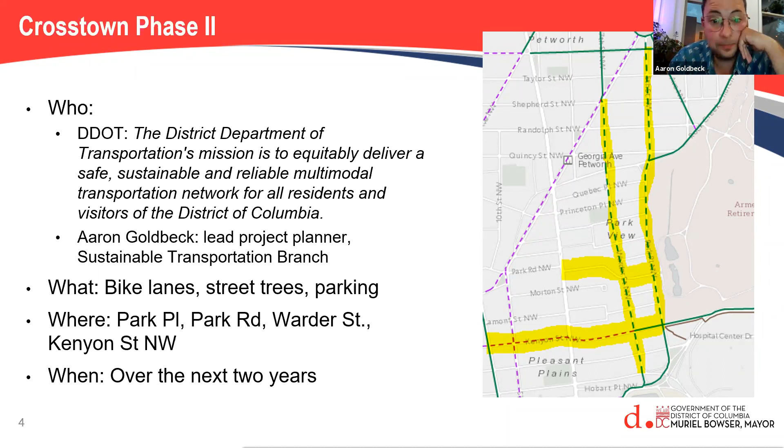She gave us a lot of money to do that, so we're working on that. We're an executive branch agency, so this is a continuation of the mayor's agenda that she ran on and won on. And of course, the budget is approved by council, so the Council of the District of Columbia, we think, also stands behind this work.

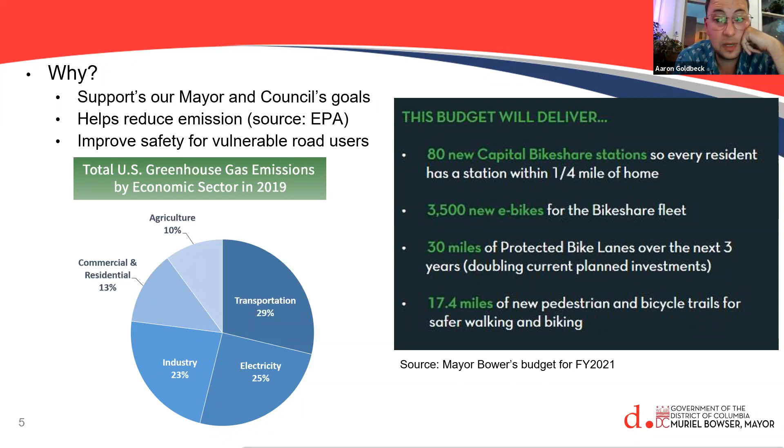Finally, protected bike lanes are the safest way we can move people around without cars on our roads. So we think this will have a net benefit to safety for vulnerable road users—bicyclists, pedestrians, and so on. So that's the why.

So how did we get here? It started back in 2014 with the MoveDC update. MoveDC is the master plan for what DDOT hopes to do in the future with all the streets and sidewalks in the District of Columbia. That recommended we look very closely at this particular area.

So we did that in 2016 with the Crosstown Multimodal Transportation Study. All of these projects we're talking about this evening were recommended in that 2016 study, which was a real deep dive—there were a lot of public meetings and a lot of outreach as part of that.

In 2017 through 2019, we did the first phase, which was the two-way protected bike lane on Irving. Now we're moving on to the second phase, the protected bike lanes on Park, Warder, and Kenyon that we're talking about this evening. We hope to be done with all this—I put next year on here optimistically, though I suspect it'll take a little longer than that because things always do. But this is the broad timeline of this project. It's been in the works for a long, long time.

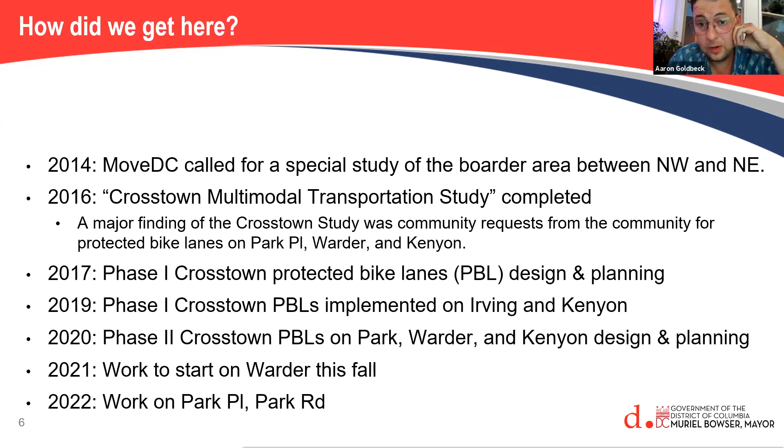So a quick update on Warder, which we've already discussed extensively in these meetings over the last year. There was an NOI published that closed back in August. Comments were very supportive, and the feedback we got was very, very good, so thanks to everybody who commented. We are hoping to begin this work for Warder in late fall—that was the most precise I could get the construction team to give, so I'll say late October, early November. I'll get a more precise update from them as soon as possible to pass on to the ANC.

They want to begin excavating the tree pits, doing this in a way that minimizes disruption—going one block at a time rather than the whole corridor at once. Trees will be planted in April, and bike lane implementation, with restriping and the addition of bollards, flex posts, and concrete barriers, will also happen in the spring. This is a little vague for Warder; I was hoping for more detail for this meeting, and I'll provide that as soon as I get it from the construction folks.

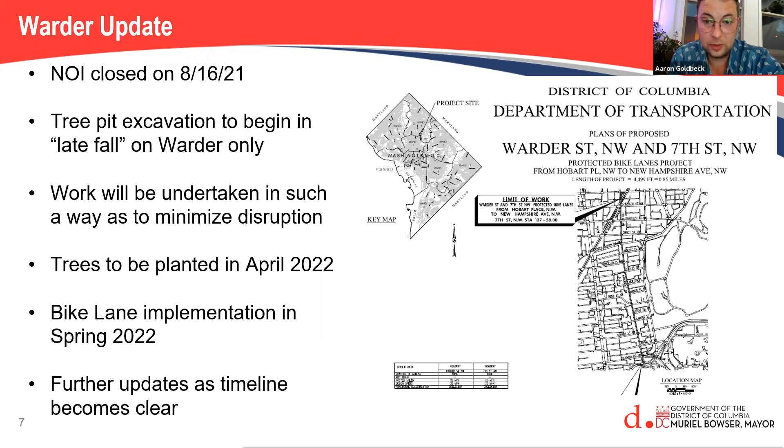Looking now at an overview of what else we have to discuss this evening, I'll show you the plans for the parking-protected bike lanes we're going to put onto Park Place. We're also going to be adding a lane of parking on Park Place. We are going to make Park Road one-way westbound—this slide is incorrect, my apologies—it's going to go west with parking along the south side of the street. We are also looking at a parking-protected bike lane on Kenyon Northwest. All of this will lead to a net parking gain in the neighborhood.

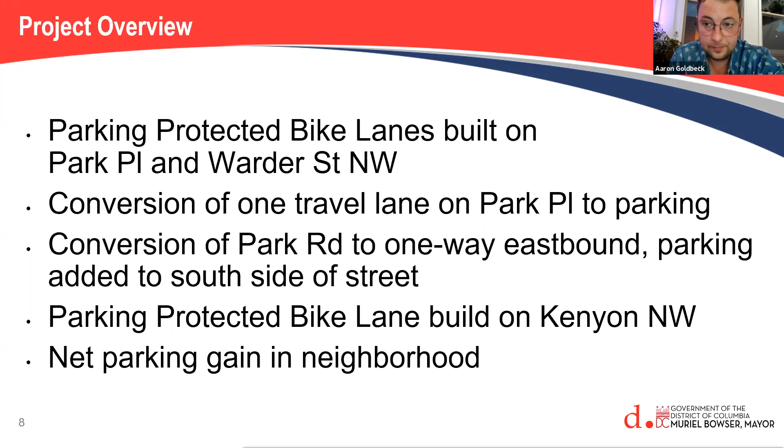When I'm throwing around these terms, parking protected bike lane, counterflow bike lane, what do these mean? I want to show you some pictures, some examples. On the left there, you can see a great example of a parking protected bike lane. It has 2 lanes for cyclists to go in both directions, and it is separated from moving cars by parked cars. Then there's a buffer for people getting out of those parked cars. There's 3 feet there for them to open their car door safely and step out and walk without having to worry about whacking a bicyclist with their car door.

I wanted to show an example of a counterflow bike lane. This is what we are looking at for Park Road as part of that one-way conversion. You can see an example here from 11th Street Northwest. That's what that's going to look like. It's going to allow for 2-way bicycle traffic on the road while only having 1-way car traffic. So nothing we haven't done elsewhere in the district.

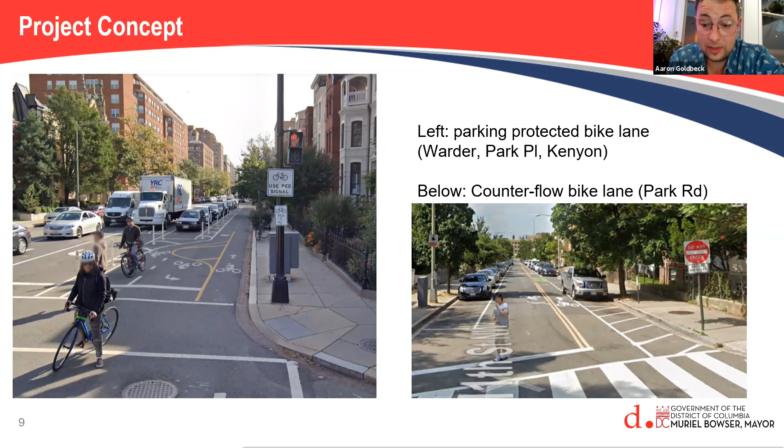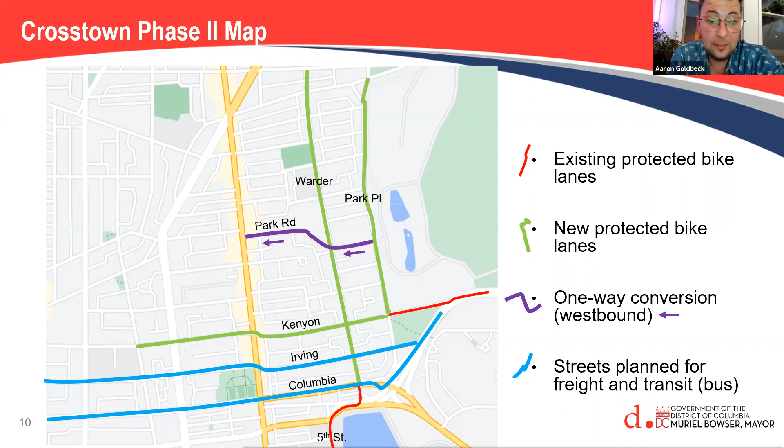This takes us back to the map just to refresh our memories. It's going to be those parking protected bike lanes on Kenyon, Warder, and Park Place. It's going to be that counterflow bike lane and the one-way conversion on Park Road going westbound. And we are going to be leaving Irving and Columbia alone for future transit, bus-related projects, which will be coming in the next several years.

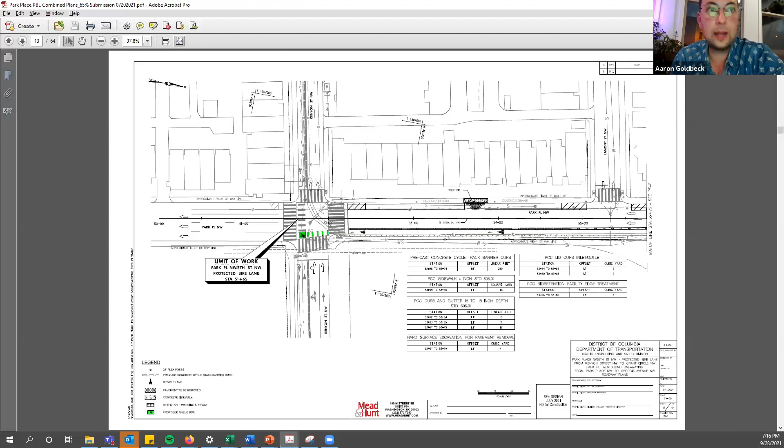So I'm going to begin here on Park Place. We are going to start here at the intersection of Park Place and Kenyon. This is the southern extent of the project as it is conceived now. So we're going to be going north against the flow of traffic. This map is a little bit confusing because north is going to be to your right-hand side on the right side of the screen. South is on the left side. West is at the top of the screen. East is at the bottom. Please bear that in mind.

This is going to be connecting to our existing two-way cycle track on Kenyon that runs east-west. We expect the majority, if not all, of the bicycle traffic to turn either left or right and proceed either eastbound or westbound when they reach this point.

Moving north, we can see the first of one of our new street trees that we're proposing here for this block. We'll be seeing 9 more of those as we proceed north. You can see the protected bike lane here is actually not parking protected. It's protected by precast concrete barriers and flex posts.

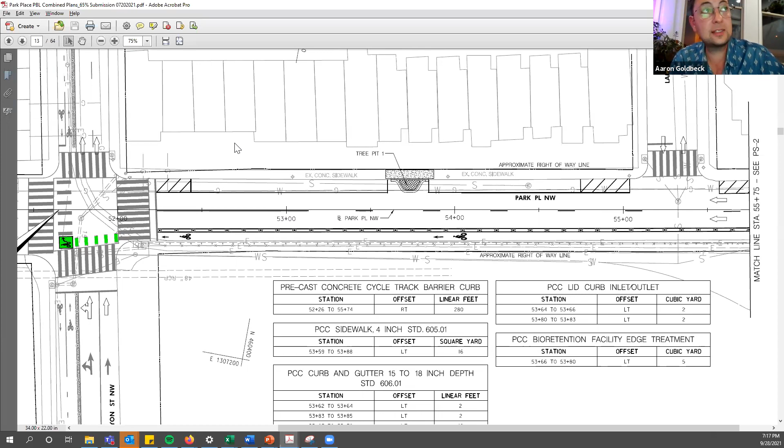Moving to the next block, we see how the parking begins here once you get north of Luray Place. This is a new parking lane on the east side of Park Place. So the parking will be on the left side of the street as you're heading southbound down Park Place. You can see here where we are also doing curb bump outs and crosswalks. This is all new stuff. They're not crosswalks this time on Park Place because there's nowhere to cross to.

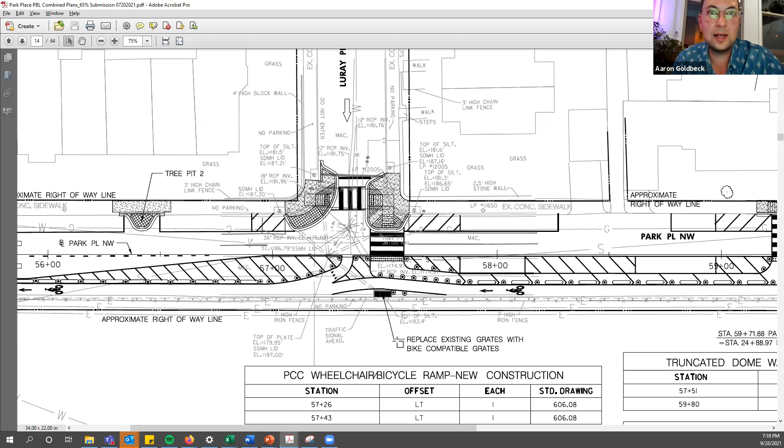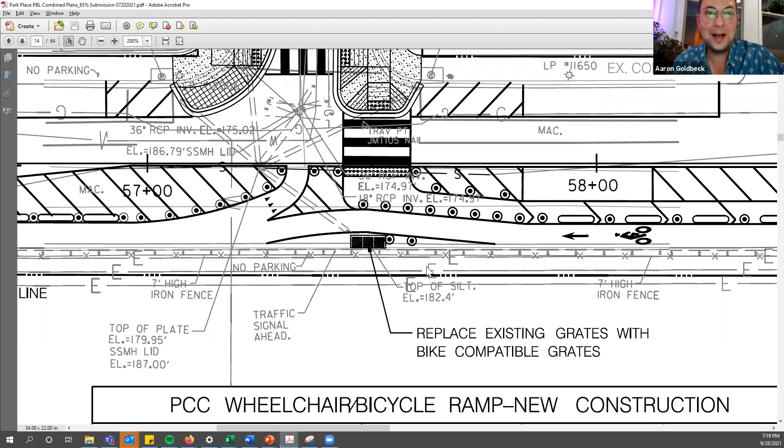You may notice that the bike lane does this very interesting sort of slalom here. You can see where the bike lane curves around, and it's to avoid this grate, which is not safe to bicycle over at this time. I expect that this is not going to be the case in the final design. We're working on switching out those grates right now, so we don't have to worry about this later as we're implementing the rest of the project. So I anticipate that when I come back with the 90% plans for this segment, this is going to be straight and nice, and you're going to be able to bike over those grates without issue. That comment has already been made by every single person at DDOT who's looked at these plans, because that does look kind of weird. So we are going to make that a nice straight bike lane.

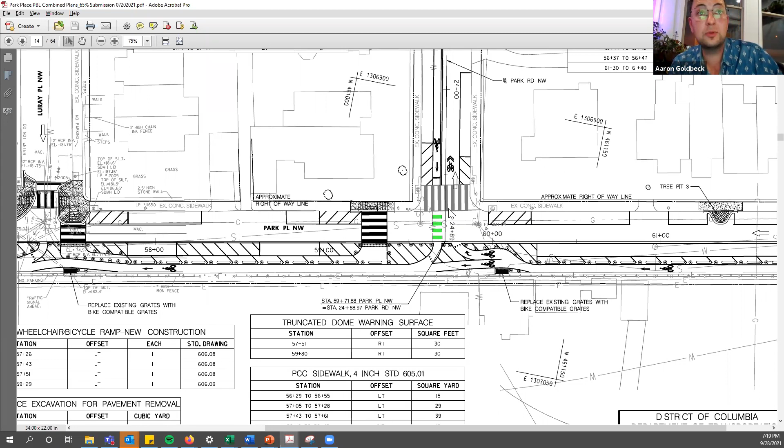So this here is the intersection of Park Place and Park Road. You can see that one-way westbound lane stretching up towards the top of your screen, and you can see the counterflow bike lane I mentioned before joining up with the Park Place protected bike lane. That's how that's going to look.

We're going to see the rest of Park Road in a moment, but we're going to stay on Park Place for the time being.

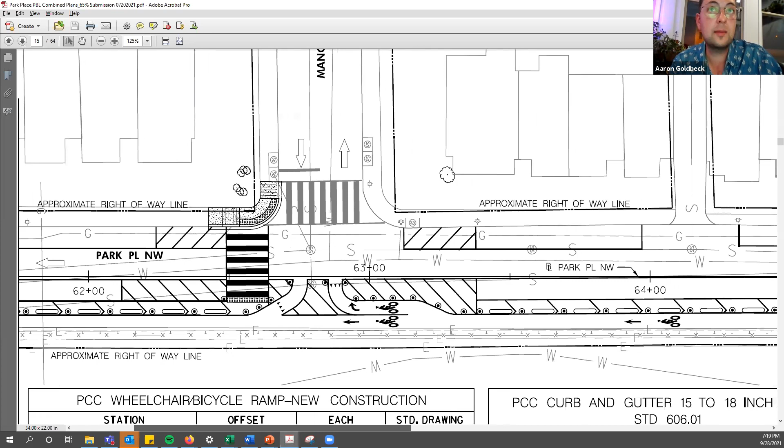Proceeding northbound, we have additional parking and additional crosswalks here at Manor. Proceeding north, similar configuration. When we reach Newton, we get two crosswalks and new curb bump outs as well. The bike lane proceeds with the parking protection further north.

And then we see the same configuration here at Otis: parking protected on the east side, curb bump outs on the west side, crosswalks, more tree pits. We're up to tree pit number five here.

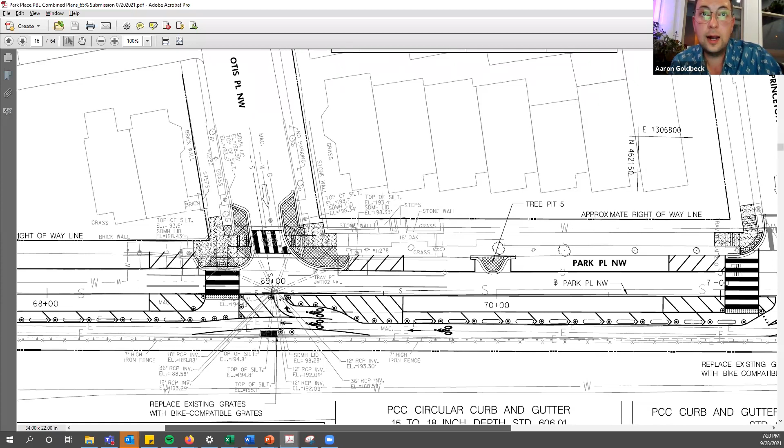And the tree pit locations are somewhat flexible at this stage of design. So if there are tree pits going in places where there are already a sufficient number of trees, and we would prefer the trees to be elsewhere, just let me know and we can scoot those around.

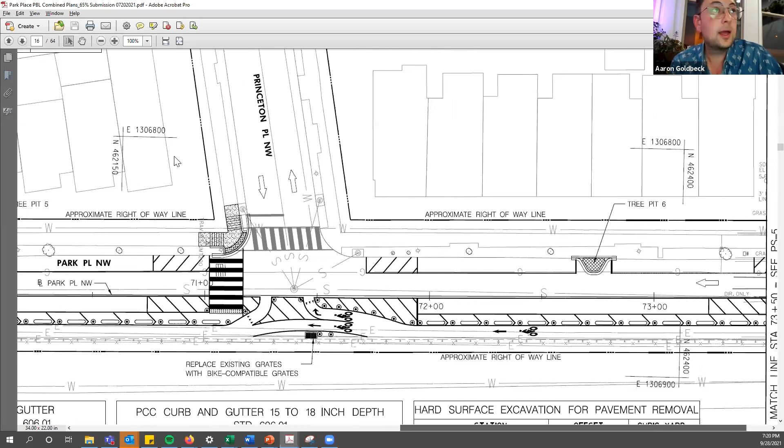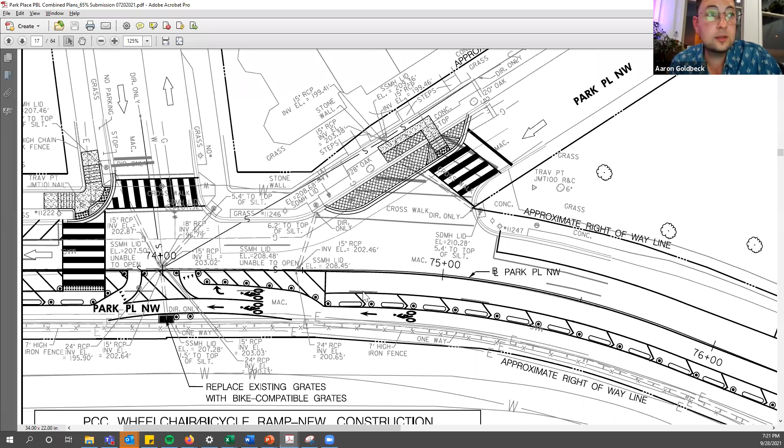So let's keep this in mind. I'm going to show you the Park Road plans as well, and then we're going to open it up for questions, answers, and feedback. So just bear with me while I get Park Road queued up.

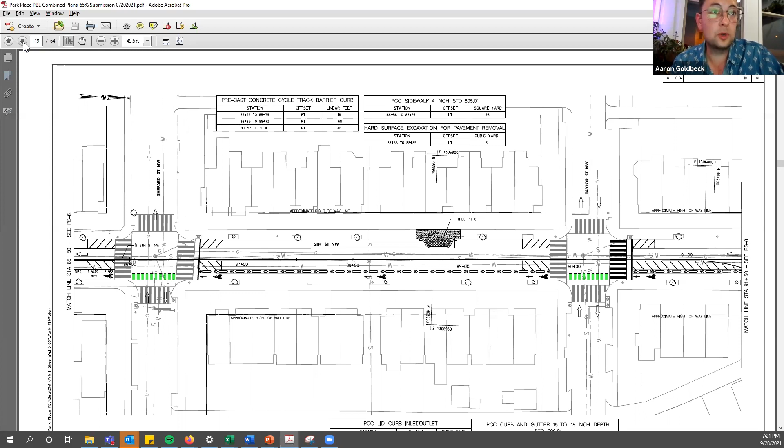So this is just how it's going to proceed north through ANC 4C. This is actually going to go all the way to Grant Circle. I'll just show you that from a more zoomed out view, because it is really the same configuration. It reaches Grant Circle here. We're very excited about this, it connects up the existing bike lanes on Grant Circle.

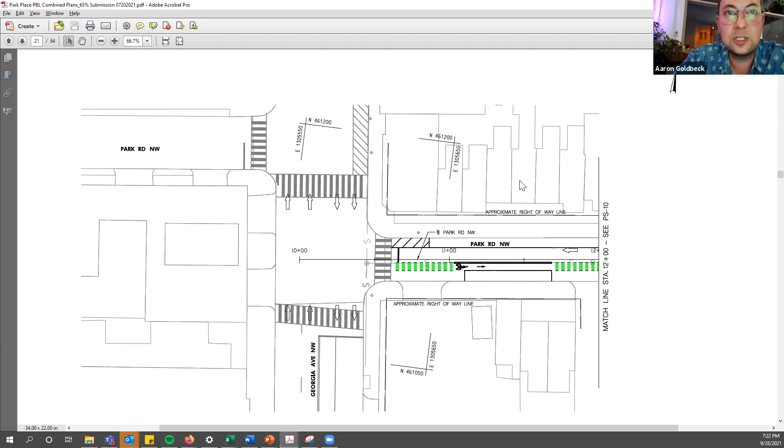So you can see the counterflow bike lane, and you can see the new parking which has been added to the south side of Park Road. And you can see how Park Road is now one-way westbound. This condition proceeds through the entire length of the segment.

We're very cognizant of the fact that Park Morton is going to be subject to redevelopment soon. So this design has been done with that in mind, especially with this alley becoming a street in the future.

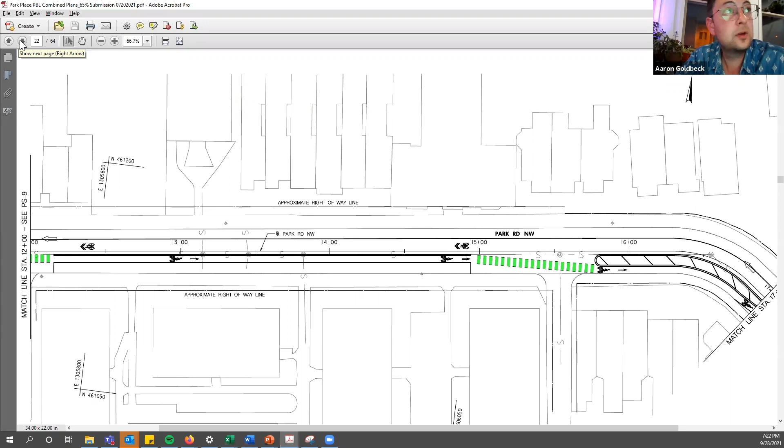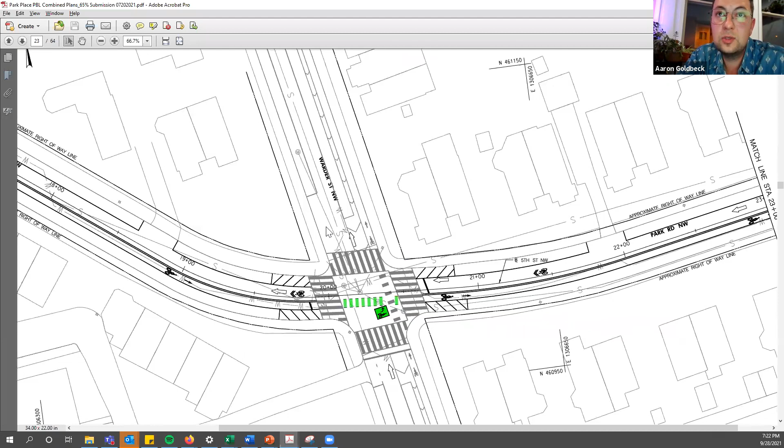And then you can see the curve in Park Road here as it crosses Warder. This is our first glance at what the Warder Park Road intersection is going to look like. Counterflow bike lane continues to the east, and there you have it. So that is actually where it intersects with the Park Place plans again that we looked at a moment ago.

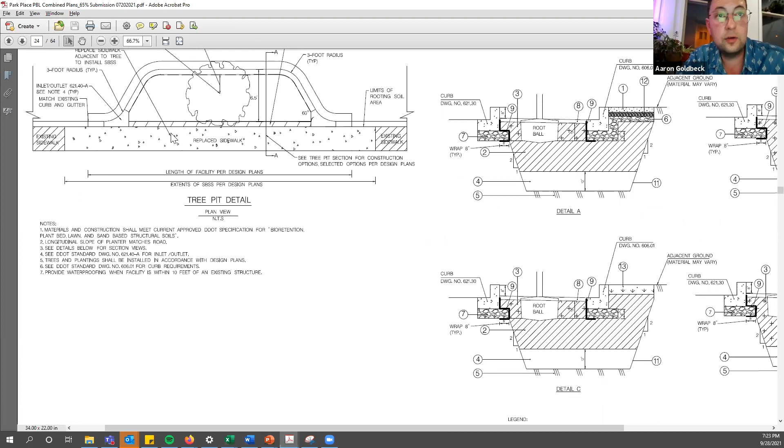For anyone who's curious what these new trees are going to look like, this is our technical drawing of the tree pit. The tree pits are going to be adjacent to the sidewalk. They're actually going to be in the roadway, but they're going to have a curb around them.

The last time I gave this presentation, I was asked if these were going to be the sort of rain garden design that sits two to three feet below the grade of the sidewalk. These are going to be at grade. We're not going to be digging a big hole for stuff to collect in and for people to wander into. This is going to be a totally at-grade tree that is going to be next to the sidewalk in the roadway itself. So hopefully that is clear from these drawings.

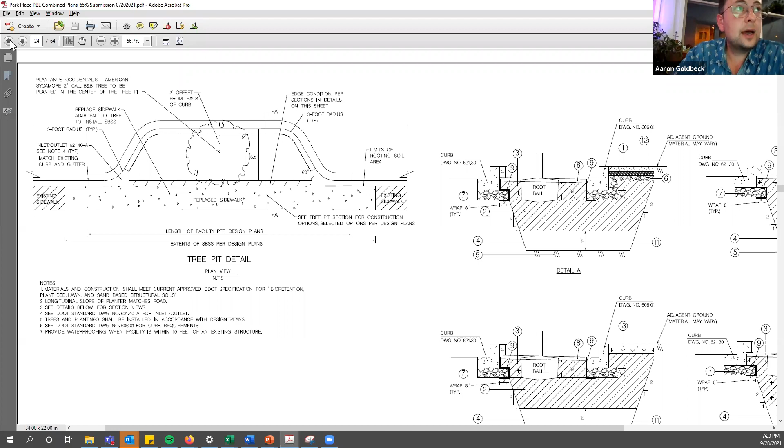All right, I am just going to back this up to the beginning, and I'm showing you all the extremely unvarnished, highly technical plan set. So if it is a little bit challenging to read, I apologize for that.

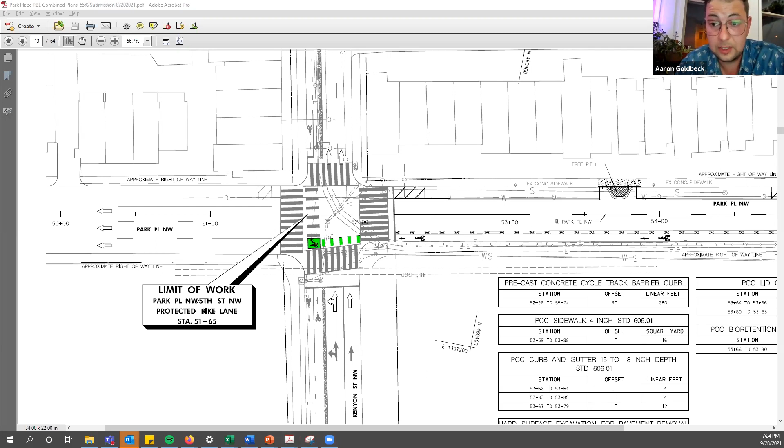And at this point, let's open it up for questions and feedback on the plans. I did go through this very quickly, so if there's anything you'd like me to cover once again, I would be happy to. Well, since I see Rashida raised her hand, why don't we start with her and then we'll go into some of these written ones.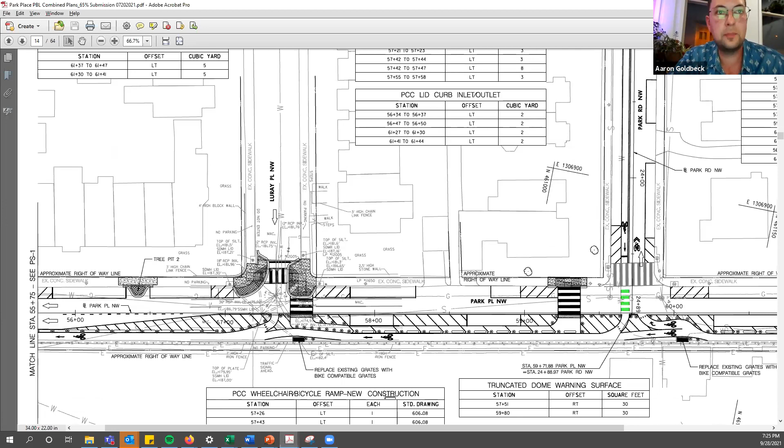In terms of a walkway, I want to clarify that. We looked at some early concept designs a few months ago that had a mixed use trail component. We ended up not going that way because we didn't believe it could be safely implemented. So the walkway component here, there's going to be a generous buffer between the bike lane and the parking lane on Park Place, and then space protected with flex posts for people to walk and reach the crosswalk and cross the street. So that's what's provided in this design, but it's not really intended for people to use like a sidewalk. It's more of how you get out of your car and get across the street.

I see, okay, and then safely cross over to that intersection.

Thank you for that. And so for the additional parking, how many parking spaces are we looking at? I don't have a final number on that yet. It's a fairly significant amount. I'm going to have to come back with that because we're still tweaking this a little bit, and I don't want to throw out a number that's wrong, but it's quite a bit.

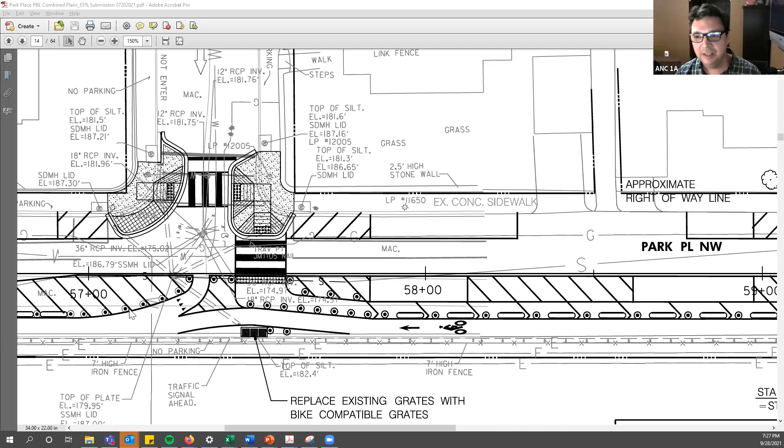Okay, and I appreciate you so much for creating that. And I have also a question about how cyclists merge from Park Place, and where you see that swervy intersection that you were walking us through earlier. How would they come to that intersection to connect to Kenyon if they wanted to connect to Kenyon? By the way, that was a question in the chat as well, going back down to Park Place and Kenyon and how do they make that transition.

So just to make sure I understand, we're looking at how you get from Park Place to the existing two-way cycle track here. Yeah, so there's going to be some further work that needs to be done on the traffic signals and how they're going to facilitate that maneuver. We haven't done that work yet because we need to get this piece baked first. I'm going to come back on these plans again when they're at 90%, and I'll have a lot more detail on those fine grain questions. So I can only answer that fairly generally now, but we're providing striping through the intersection to direct cyclists and facilitate that turning either east or west. That's about all I can say right now. Am I addressing the question?

I think it's a great update for where you are now, but I would assume that people would want to come onto Park Place to get through Kenyon to access Georgia Avenue safely. I know you're not at that stage yet, but in looking at the designs, that was one of the things that came to my mind, is how they would safely cross onto that intersection. Got it.

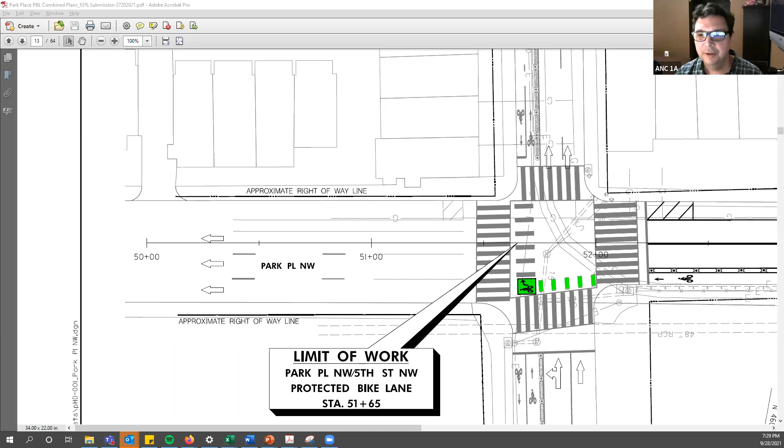There was a request to go back to Park Place at Princeton Place, near Commissioner Boese's SMD. Can you zoom in a little so people can get a good look at that? There is a general question about the trees and curb bump outs, and why we're installing those.

I'll start by saying Warder and Park Place do not have a lot of street trees. That is one of the hottest areas in the city, routinely ranking over 100 degrees on warm days, and showing up on maps as one of the hotter areas. So the ANC pushed quite a bit to get DDOT to add more trees to this area, and this has been the solution. I'll let others add more, I know this was big on your list.

I would like to ask if the tree installation also comes with sidewalk improvement. It does, yes. But that's also with a caveat - this is not a streetscape project, it's a bike lane project. So the tree pit itself may improve the sidewalk around it, but the sidewalks in total aren't being redone, because that would involve realignment of sewers and underground utilities, electrical, and streetlights. So just keep that in mind.

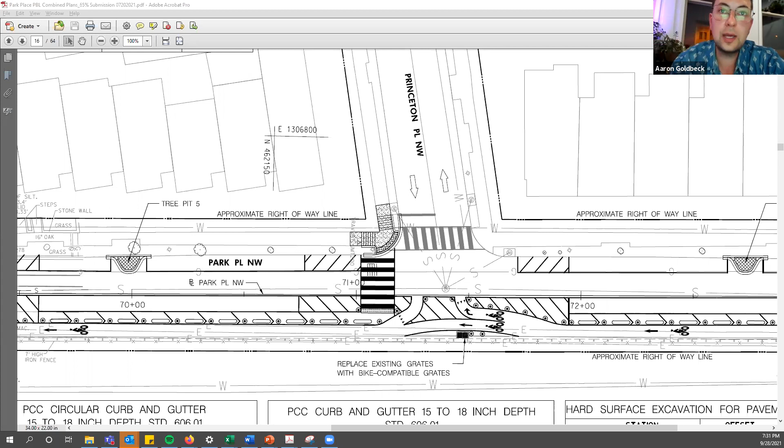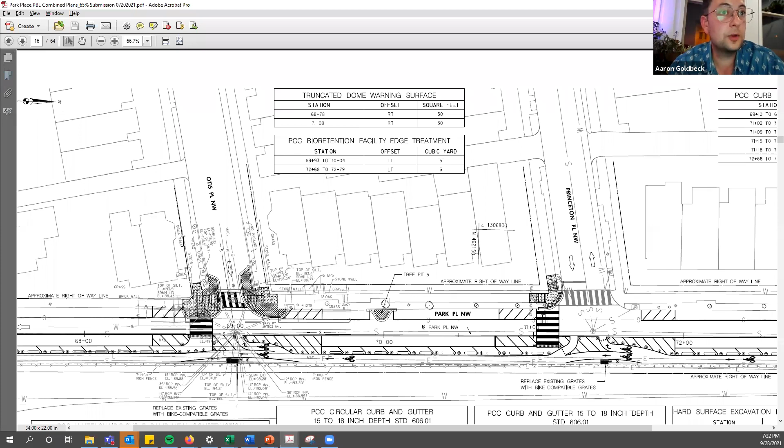Tatiana asked what the travel lane widths generally are going to be. We're looking at 11-foot travel lane widths, I believe. I don't know if we show that in this plan set or if that comes in the 90% plan set, but they're going to be standard for the city, to facilitate fire and EMS traffic, but also have a traffic calming effect. We don't want to build them too wide so people are induced to speed, but not so narrow that they're not useful for larger emergency vehicles. That's what we're aiming for here.

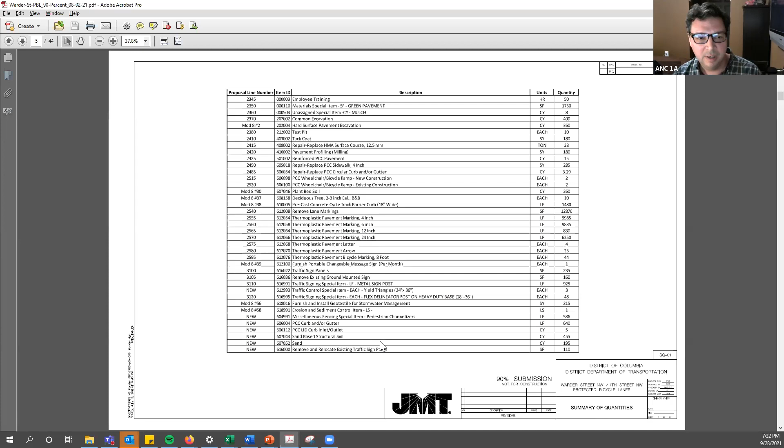There was a question - do you have the plans for Warder handy? I do, yes. There was a question about 3577, to see if the curb cut going into this particular property is in your plan. Let's take a look. I don't know if you can get that specific on your end - not in this set, but if you gave me a cross street we could find it pretty quickly. It's directly across from the entrance to the Parkview School. So it's going to be Warder between Newton and Otis.

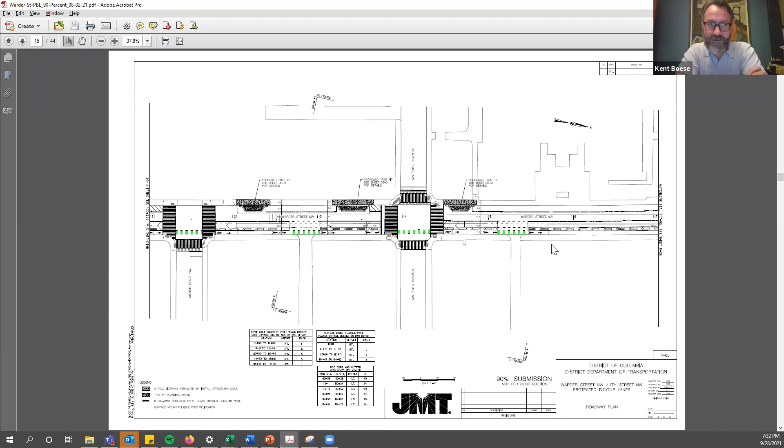So it looks like the only curb cut we're showing here is the alley. Yeah, and that is flawed, in that there is a 5-unit apartment building that has a curb cut for their parking. Okay, that is great to know, we'll take a look at that. Now this is why we have these meetings.

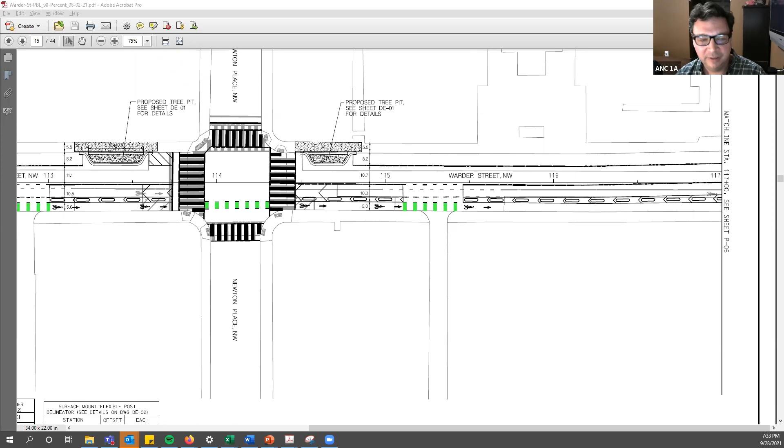One of the questions was, will this widen any of the sidewalks? The quick answer is no. Those unfortunately cost significantly more than the budget we have for the project, because you have to move sewer systems, drain lines, and other infrastructure pieces. So we will not be expanding any sidewalks with this project. Yeah, that is correct.

Still kind of clicking through here. Hold on.

An anonymous attendee asks if Park Place loses a sidewalk to gain a bike lane. We're not removing any sidewalks. In fact, there's no major infrastructure change other than the inclusion of the tree pits.

Another question was about those grates, whether those are for stormwater. They are, yes. That's how the runoff from rain gets out of the neighborhood.

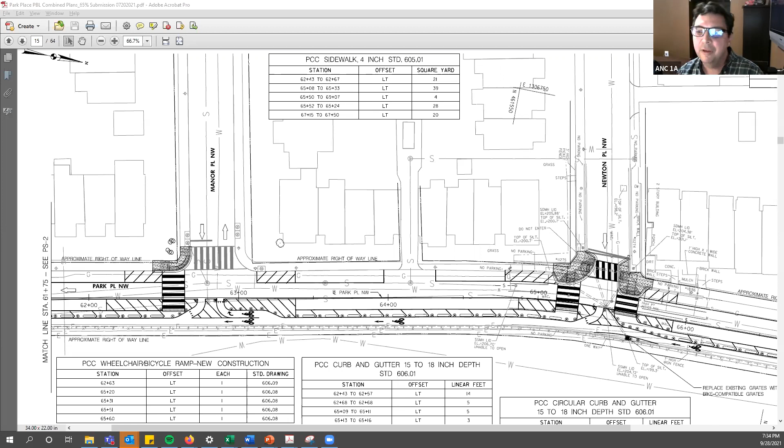The area south of Kenyon is not shown. Do you want to talk about Park Place south of Kenyon, and the project boundaries? We have a limit on this project where the furthest south we've been looking at is the intersection of Kenyon and Park Place. We have not looked at doing anything further south.

Issues further south have been raised, and when I've brought those up to the engineering team, they've said that by reducing the number of lanes and the speeds on Park Place, they believe it will have a traffic calming effect downstream south of Kenyon. But I've been hearing there's a lot of concern in the community about unsafe conditions on Park Place south of the extent of this project. So I'm going to see what I can do to get us to look at Park Place further south and see what safety improvements we can make around the Wangari Gardens area.

We do hear that is a pressing concern. I agree. The limits of the project are put in place to keep us on budget and keep us from spending a million years doing a project that ends up all over the city. So I might lose this fight, but this is something I'm interested in taking on myself, to see what we can do for at least that one block on Park Place further south.

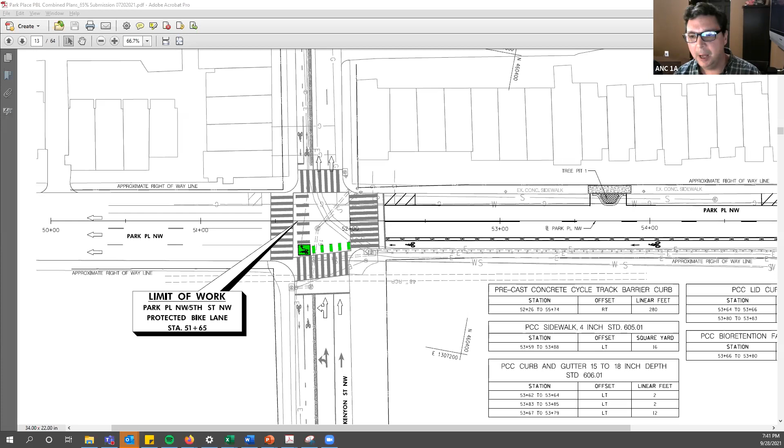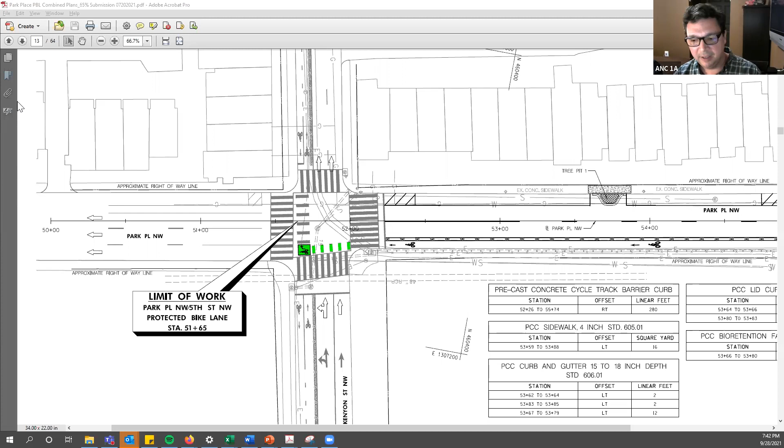Garrett asked about the spacing beside the bollards on Park Place that gives a little bit of a walkway. The concern is that the bollards are closer to the bike lane than they are to the cars. Is there a way to reverse that to give a little more walking space or a little more breathing room between the bollards and the bike lane?

Yeah, so zooming in on that, you do see that the bollards are in line with the precast concrete. I suspect we probably don't have a ton of room to maneuver those around because we were trying to create this 3-foot buffer and sort of pedestrian aisle here. I know that the shy distance for the cyclists might be a little close. We'll have some, I don't have the precise measurements on this yet. That's going to come with the 90% plan. So we'll take that comment down and make sure we're trying to balance both the needs of people getting out of their vehicles and the experience of the cyclist proceeding southbound.

Ms. Parker has been waiting for quite a while, so I'm going to allow her to ask her question live.

Ms. Parker, I'm hoping that you can unmute yourself and ask your question. Ms. Parker, are you still there? I know it's been a while, you've had your hand up for some time. Hello, can you hear me? Yes, we can. Okay, hi, yes.

I'm in the 3200 block of Warder Street. So when you put the bike lanes on Kenyon Street, you took away a whole street of parking, which makes it hard to find a parking space now. So are you talking about going further up Kenyon? Are you going to do the same thing that you did on, I guess, what is it, the north side of Kenyon Street? Are you going all the way up with a bike lane up to Georgia Avenue and across?

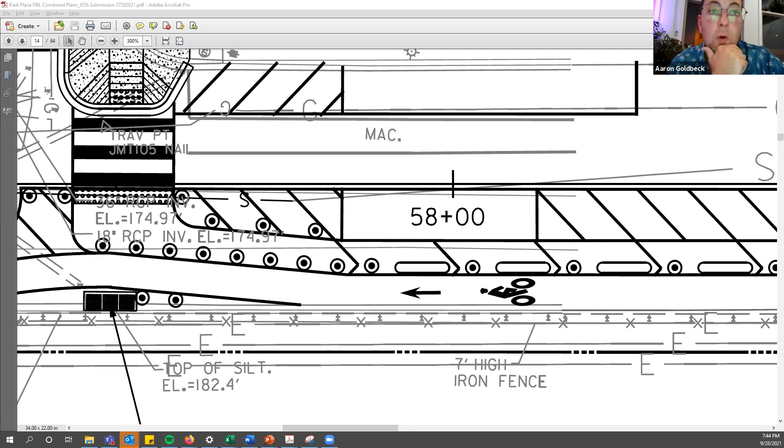Well, yes, that is a great segue actually into the next thing I want to talk about. I want to show what we're considering for Kenyon. So that means you're taking away more parking space?

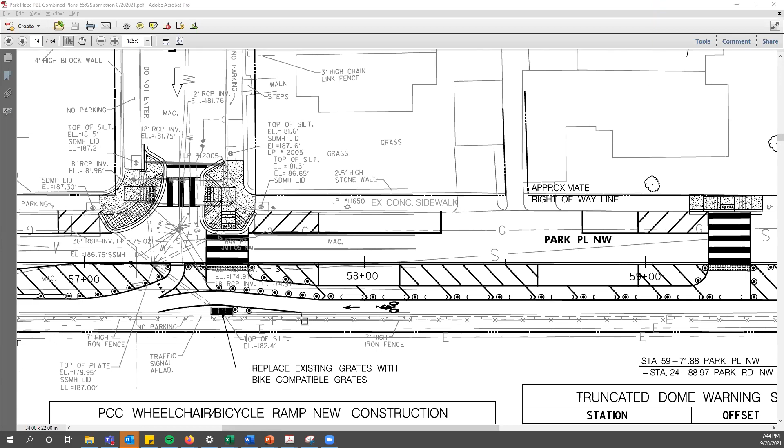It'll be easier if I can show those plans. That's why my question is kind of hard to see on the map, because as I say, you're fighting for parking space terribly in this area right now. So if you're taking away more parking space, it makes it hard. People feel like they don't want to go out because where are you going to park? So if it's going to be a one-way, I don't know if this was ever in the agreement, can it just be one way so people still have that parking, where you can still park? Because when you take away parking space, when I say people are fighting for parking space now, it is terrible.

All right, Ms. Parker, we're going to move on so that we can show you those plans, and then we'll have you back. So I'm going to take you down for now.

And Ms. Sands, I'm going to unmute you because you also had your hand up for quite some time. Hi, can you hear me? Yes, we can. All right, great. So apologies, I missed the very top of the call.

But I also wanted to weigh in partly on the Kenyon plans and partly on the Warder bike lane. I'm just concerned that everyone is moving forward with a whole other project in the neighborhood when during our last meeting, we raised several issues about the one block on Kenyon that was done. And no steps, as far as I can tell, have been taken to fix those issues that we were told would be looked at in the last meeting we had.

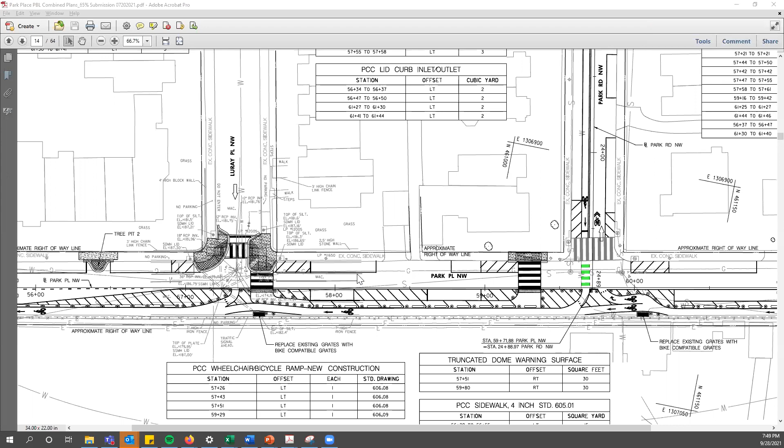So the assumption is that disembarking, let's not speak over him, please. Sorry, going, the assumption is that we're going out. Let him finish his answer to your question, please. But all I was going to add to that was that I hear that the pedestrian aisle is perhaps more narrow than is comfortable, and that's, I think, a great piece of feedback for us.

That's something we're still thinking about. You'll notice we don't have the spacing specified on this plan because we haven't nailed that down 100%. So that feedback is great for us to hear, and I'm going to make a note for the engineers to take a very close look to make sure we're accommodating everybody safely, people disembarking their vehicles and people using the cycle track.

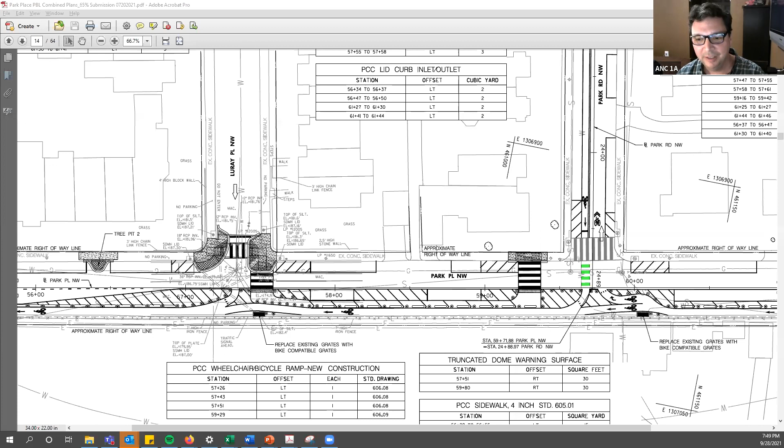Okay, well, sorry. We're going to move on to Kenyon because I know a lot of people are asking us to move on to Kenyon at this point. So let's handle that part of it, Aaron. Okay, so I'm going to pull up those plans, which hopefully everybody can see now.

So with these plans, you're going to notice a few things. These are 30%, at the concept phase, so there's going to be a lot less detail, which might actually make it easier to see what's going on. Once again, north is at the top, south is at the bottom, east and west are left and right, so it should be easier to read. We're going to start here where Kenyon splits off of Irving, and I'll show you these plans as they proceed westbound to 11th Street. Once we've seen the whole thing, we'll go back and do Q&A and feedback.

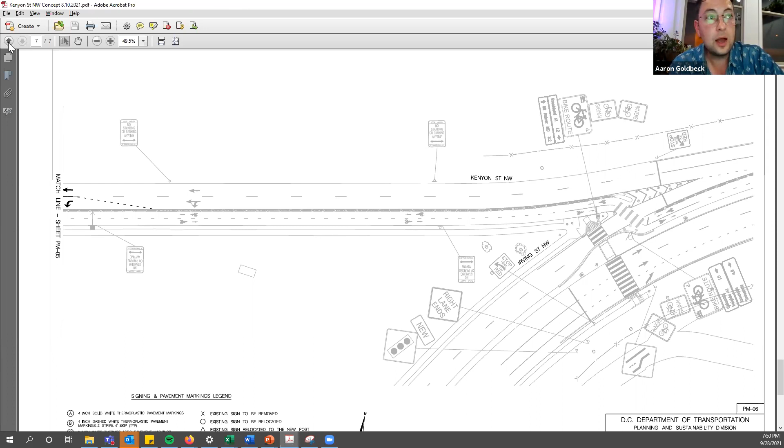So the first change we're proposing, I want to draw your attention to the intersection of Park Place and Kenyon, to the east. In the existing conditions there's a combined straight and left turn lane. We're proposing to eliminate the straight-ahead and make that a left-turn-only lane, so there's a single lane taking traffic onto Kenyon, feeding into the travel lane, which on the 400 block becomes a right-turn-only lane for the entire second half of the block as you approach Warder.

This design is intended to optimize the flow of cars through this area. We've been receiving feedback that there's congestion here, cars queuing and standing, both on the 400 block and on the approach to it. So this design essentially removes parking in the roadway to maximize our ability to get cars through this area and out of the way.

This is a trade-off, and this may not be the right trade-off. We've already had some preliminary conversations about this, but this is a very early draft, so we want your feedback here. If people are willing to deal with a little more congestion on this block, we might have some opportunities to put parking back in, but it is a trade-off. I just want to make sure that's clearly articulated.

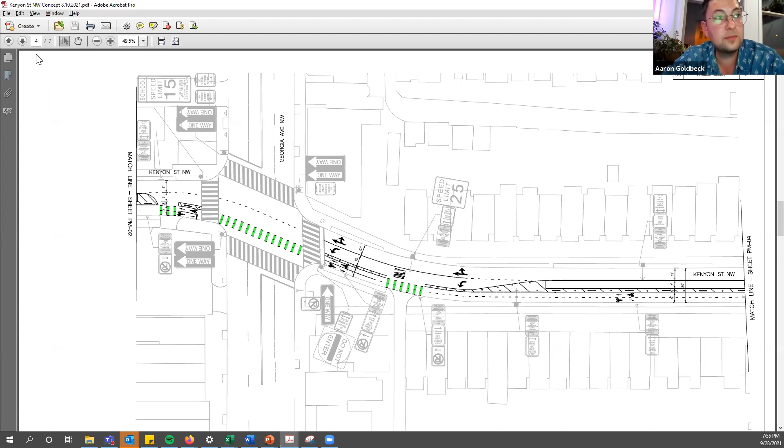So we'll be coming back to that when we do further iterations of this design. And then the same configuration proceeds down Kenyon towards 11th Street, or towards Georgia here, where for this block as well it's eliminating the rush hour restricted parking, keeping the resident parking on the south side of the street with the two-way protected cycle track. And then that finally gets us across Georgia. You can see our first draft of the intersection treatment there. And it proceeds all the way to 11th Street, where we move the bicycle traffic onto the 11th Street bike lanes.

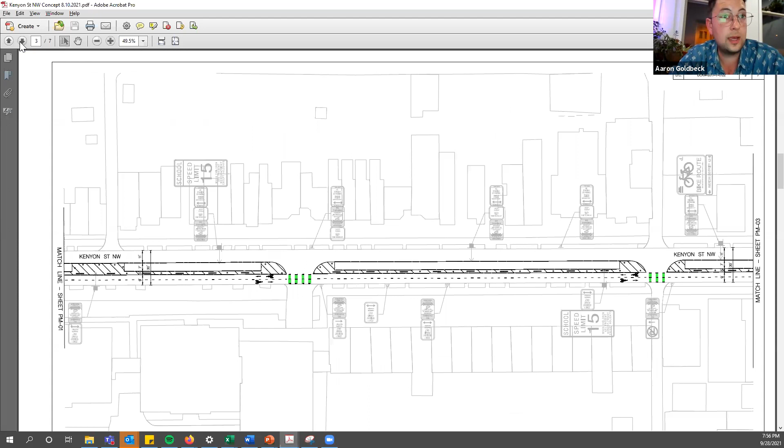So I moved through that fairly quickly, but that is our concept. This is an early design. There's a lot of room for things to change based on people's feedback. So I'm going to back this up to the 400 block of Kenyon, where I know we have some questions, so we can take a look at that. And let's open it up.

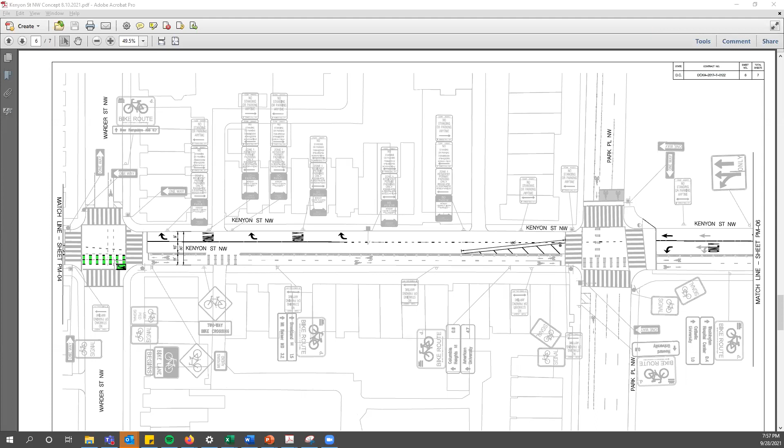I'm sorry, I'm afraid I'm not following the question, can you restate it for me? If you're driving from towards where the hospital is onto Kenyon and you're crossing over Park Place, you have the straightaway arrow on the north side of the road, but if you go straight, you're just gonna hit a parked car in front of you. So this design is proposing eliminating all of those parking spaces.

I don't think that's acceptable to the residents on this block to have no parking. In fact, I think we need more parking. It's been really difficult since this bike lane's been put in. So that's my thought on that.

I thought we had talked last time about creating a merge so that cars would just merge into the one lane onto Kenyon. Yeah, a number of things were discussed. This is what the engineering team gave me to get feedback on. Okay, well as a resident of the 400 block, my feedback is that getting rid of more parking is not the answer. Thank you.

And then we also discussed, and I didn't hear in the plans, that the lights, the timing of the lights on Warder and Kenyon, when the bike light turns green, cars think that is the car light, and it causes honking and stress every single day here. Where are we in the plans to fix that?

Well, so in terms of changing the dedicated cyclist signal, the signal team was not willing to do that because then it would create an even worse problem with bicyclists not knowing when to proceed.

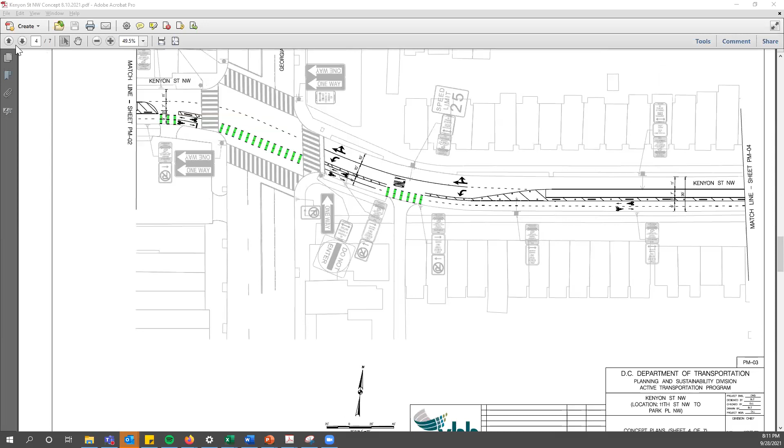I had a few small questions and maybe just some encouragement for the commission. I've been involved in the process of planning for this since it started with the 2014 Move DC plan, saying we need to look at this and figure out how to get bikes, buses, trucks, and traffic east-west. I was there for the crosstown study, which looked at that question in depth, which more or less, as you summarized, identified that really the best way of doing this, with very few options, is buses, trucks, and cars on Irving and Columbia, and an east-west two-way low stress protected bike lane on Kenyon.

So I do appreciate other residents asking if there are other places this could go, and I think a lot of work has been put in to discover that, in fact, there are very few ways of getting this done, and Kenyon is the best. So with that said, I think the plan is good. We should obviously minimize as much parking loss as possible, which I can see you're doing. My question: in the same way that the Warder and Park Place projects turned into an opportunity for adding street trees and focusing on traffic calming with curb extensions and improved crosswalks, are there opportunities for that with this project?

I know especially the last block of Kenyon before Georgia is a very long block. Even something like a mid-block crossing could help with the traffic calming problem. So are there opportunities for traffic calming with this project?

I can look into it, beyond the traffic calming effects that the project has inherent to its design. Doing a mid-block crossing here, I don't know—we were really hoping to avoid doing any concrete work to keep this project light and relatively quick, so any additional add-ons do slow things down and make them more expensive. But if there is a serious need or desire for a mid-block crossing here for other elements, we can take a look at it.

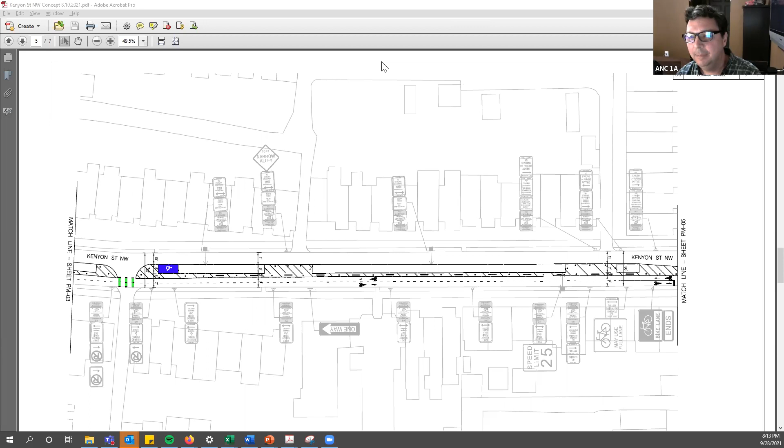Bailey, you should be able to unmute yourself. Hello, would you be able to go back to the one that goes from Park to Warder? I'm just trying to get my bearings on what I'm about to mention. So we've got Park Place, unless you meant Park Road to Warder. No, this is Park Place is what I meant.

Yes. Okay, so the lower lane, not the right turn only lane, that is going to continue into being the top lane from Warder to Georgia—am I correct? The northernmost lane, am I correct on that assessment?

Run that past me one more time. So the travel lane, it's on Kenyon. It will be the southernmost lane going through the intersection, not turning right, and then it will become the northernmost lane when it crosses Warder and heads towards Georgia. Yes, that's absolutely right.

So my question is, I first off love adding more bicycle infrastructure. I head down Kenyon all the time, and it would be really nice to have a protected area, so I do like a lot of parts of this. My one question is, do we need this long of a right-hand turn lane here? Because it doesn't seem to make sense to lose all of that parking for a right-hand turn lane when the southernmost part of Kenyon isn't going to hit the bike lane. I don't have a car, so I have no stake in this game, but to lose all of that parking just for a right-hand turn lane that doesn't seem to be adding much, except for being a very long, showy Guinness Book World Record long turn lane.

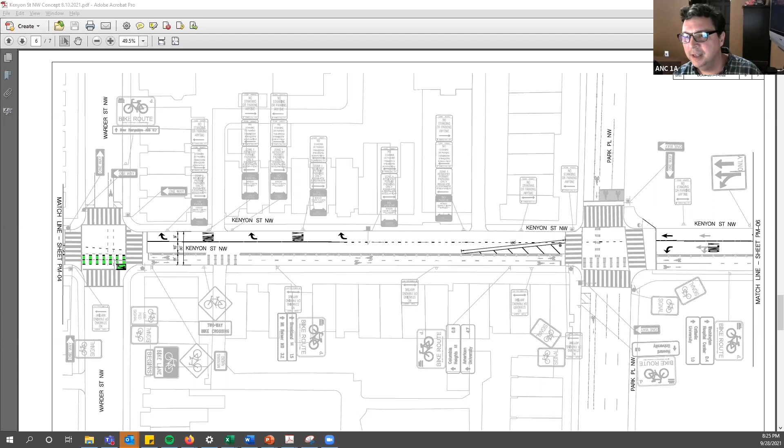I've also been following this for years and participated in the first session where neighbors put Post-its on top of your graphics and had all of our opinions. And I was crushed to see that a brand new line of 12 more parking spots was being placed in front of my house, between me and the view of the foxes and the old soldiers home, so it's not going to be Park View anymore, but Parking View.

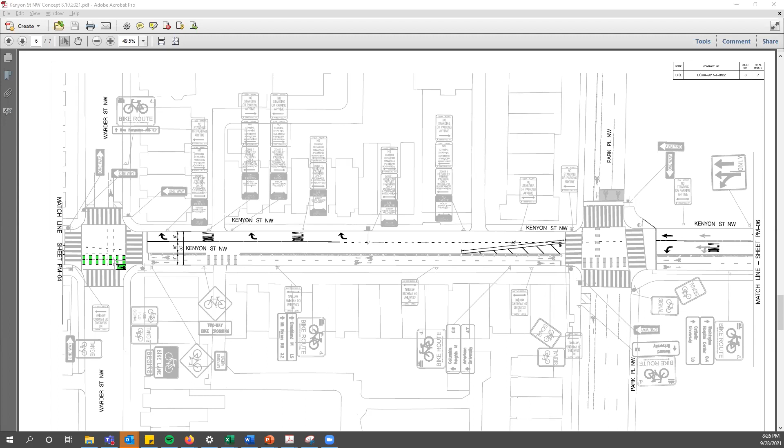So going beyond that, because I've tried to share this with you multiple times, I saw in the design you're sharing that you're moving the crosswalk to the southern side of the Princeton Place intersection. Will that stay?

Let's take a look at that. I've got to switch back over. Okay, so we want to look at Princeton. Yes. Where am I? While you do that, I wanted to say the northern end.

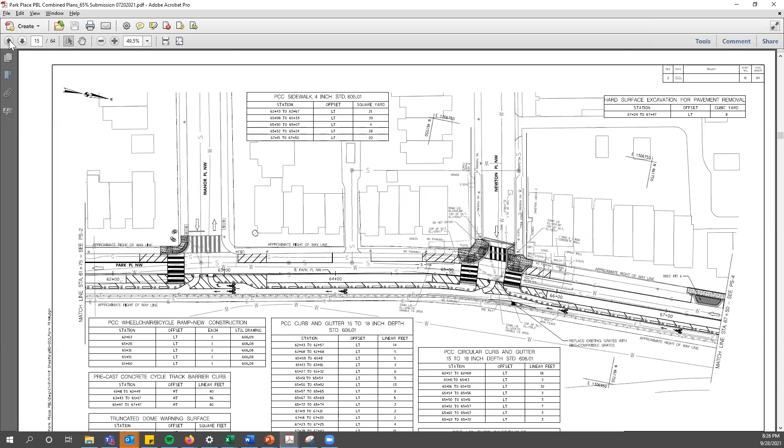Absolutely, Tim, safety is the most important thing, and I completely agree with that. And the issue with Uber Eats drivers parking anywhere is a huge deal. At my intersection, it's not just the Uber Eats drivers. Honestly, it's also the curbside drug pickup and the curbside idling for drug use. Those things are huge issues already because there's always available parking on my block of Park Place.

I think there's already always available parking. And if you look out the window, which I hadn't done very much until the pandemic, but now I don't do much else, you will always see curbside pickup of drugs and people idling for whatever reason. I don't really understand the need for doubling that, but I promised myself I wouldn't say that same thing over and over again.

But as far as the Uber Eats driver issue, the stripes you have on that bookend, the new line of parking and the existing line of parking, is it possible to put bollards there so those don't serve as Uber parking? Yeah, no, absolutely, that's something we can do to keep those areas clear.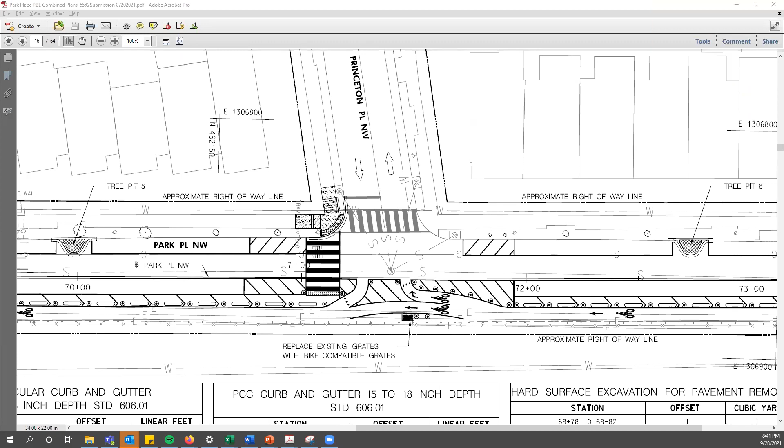No, thank you, I appreciate your comment and engagement on this, and don't worry, you're going to be seeing more of me. I did want to point out, and Aaron, I don't know if you followed along, but we did do a poll in the middle.

For those that didn't look, for the first question on overall impression of the Park Place design, we got 66% favorable to 21% opposed. On the addition of the street trees, we're at 86%, so that's coming across well. The Park Road design was 66% in support, so that seems to be doing pretty well. Kenyon is a lot closer in terms of support versus opposition, and I think there's still some work to do. As we said, maybe changing the way enforcement is being done would help make sure the spaces available are going to our residents.

And I've got to say, these last two are really, I shouldn't say shocking, but they're not happy-making. 76% of people feel that car speeds going through our neighborhood are too fast, and almost 70% of people have been involved in a collision within our neighborhood. So this is why we're trying to affect a change. I appreciate your being here tonight, Aaron. I don't know, Commissioner Bass and Commissioner Brown, do you have any closing statements?

Well, I don't know about a closing statement other than I too am grateful for everyone who showed up tonight, not just to look at the plans but to provide great feedback. I think there's a lot of observations and questions that came up tonight that will make this better, and in some cases caught things that were missed, and that's exactly why we're here.

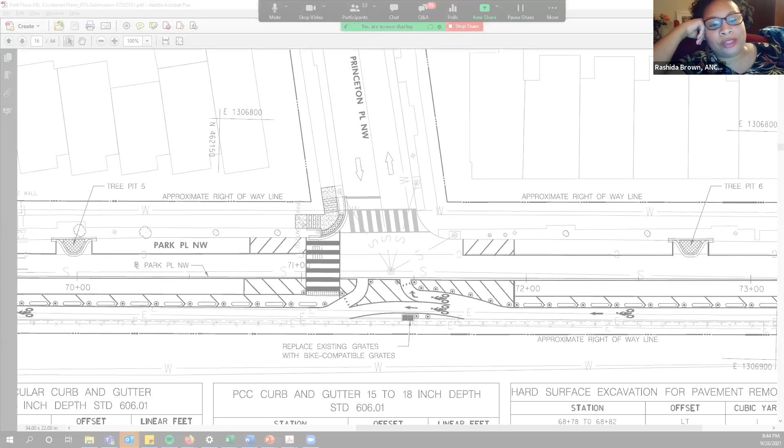This is just the start. These are ongoing conversations we've been having with DDOT on these conceptual designs. Aaron, I really appreciate your time and engagement working with the engineering team to put together these concepts. I just want to ask the community to please stay engaged in this process, continue to get updates from the ANC. We want to hear your feedback, we value it, and we've been pushing DDOT also on outreach. So like I said, this is the start of this. These are draft designs that we're seeing, and we just appreciate everybody for participating today.